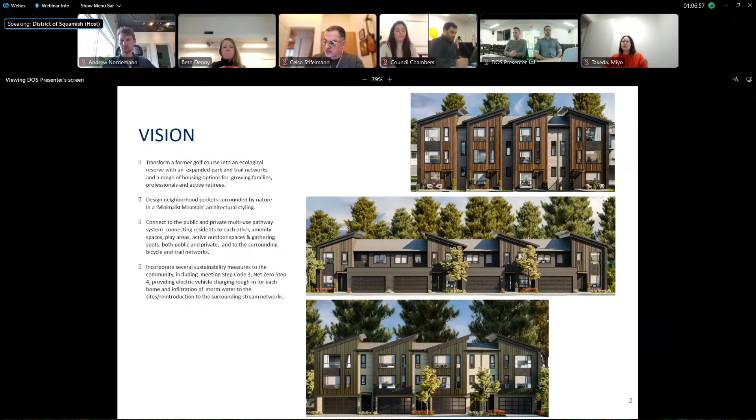Glenwild specifically, it was to design a neighborhood pocket surrounded by nature in a minimalist mountain architectural styling. We are also looking to connect to the public and private multi-use pathway systems, connecting residents to each other, amenity spaces, play areas, active outdoor spaces, and gathering spots, both public and private, and to the surrounding bicycle and trail networks.

We are also incorporating several sustainability measures to the community, including meeting Step Code 3, Net Zero Step 4, providing electric vehicle charging rough-ins in each home, and infiltration of stormwater to the site and reintroduction to the surrounding stream networks.

We'll go back to architectural influences. So we're taking the cues for our architectural influences from the surroundings, but putting a contemporary twist on it. We're looking at a minimalist mountain architectural styling, focusing on simple, clean lines, distinct mono-pitch roof forms.

Paired with contemporary window forms and groupings to help identify the unique character. Fiber cement board and batten siding in natural colors, fiber cement horizontal plank cladding, fin walls, timber and glass canopies help create the exciting architectural character that Squamish is known for.

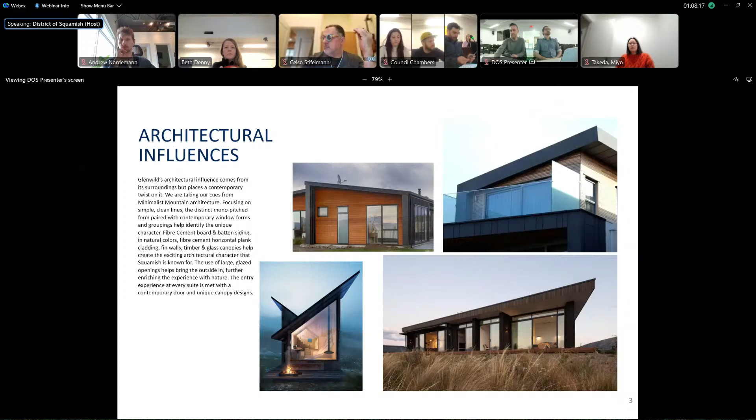The use of large glazed openings helps bring the outside in, further enriching the experience with nature. The entry experience at every suite is met with a contemporary door and unique canopy design. So just some samples of some of the inspiration we took when looking to create the design of these homes.

So just a quick outline on how we chose to address color on this site. We have 5 different color schemes, and all colors reflect the natural surrounding area. So we've selected very natural colors. Now, each of the 5 color palettes is applied to the building 2 different ways, so we have really 10 distinct color palettes applied across the site. We have 34 buildings across the site, so each color application only appears on a maximum of 3 or 4 buildings. So the color palette is quite distinct and unique.

Maybe I'll quickly talk to further variations. So aside from the 10 color schemes and material applications, we have 2 unique entry canopies applied to these buildings. The first is a wood and glass canopy that is cantilevered from the building. The second is a flat roof entry canopy with timber beams and posts and exposed ornate connections. I should also note there are 2 different door colors we're using across the color schemes, as well as 2 different garage door types: one standard garage door and glazed garage doors in key locations.

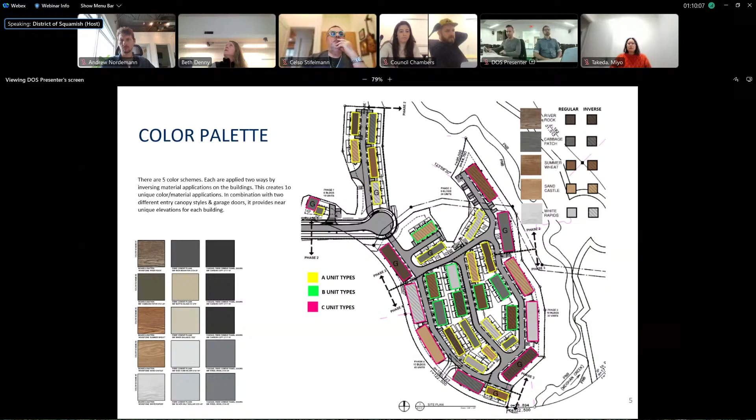So just an overall snapshot of where the development is in the overall Garibaldi Springs site. Glenwild, like I said, is the final group of townhomes in the 120-acre Garibaldi Springs community. We're providing 123 homes of varying sizes, including ground-oriented adaptable homes sited on the southern end of Garibaldi Springs. We have 36 ground-oriented adaptable homes scattered across the site, meeting the housing requirements set out in the DPA. The planning has been designed to work with the unique shape of the site, which is certainly interesting.

Connectivity to the adjacent trail networks has been accommodated with links through the community. A large outdoor amenity space has been provided at the entry of the site. This area was selected carefully to ensure accessibility was achieved for all residents. The contemporary architectural expression has been threaded through all homes: simple asymmetrical forms, large glazed openings that invite the natural world in, and crisp, clean details.

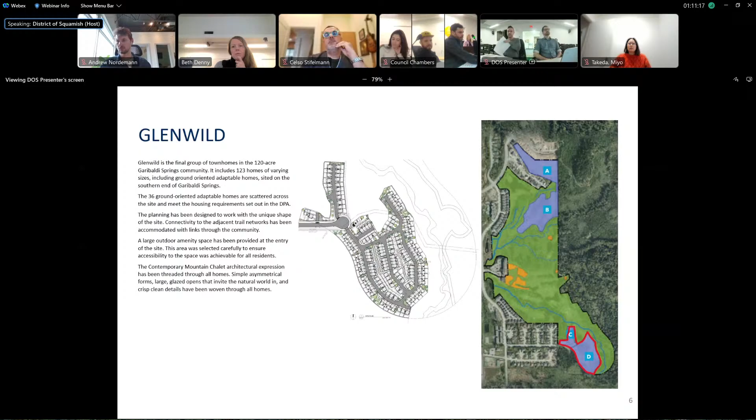Flip to the next slide here. So a closer look at Glenwild, just highlighting some of the key parts of the site.

Our mailboxes are located off of the sidewalk up on Newport Ridge Drive. We have a centrally located garbage and recycling space that meets all requirements. All of our ground-oriented adaptable homes are located around the perimeter of the site, and then we have our outdoor amenity space and community monument right at the entry.

So I'll turn it over to Travis to speak to the connectivity on the site. Thanks, Ryan. I'm Travis, the landscape architect with Van der Zalm + Associates, and I'll start with connectivity. I don't know if you noticed in this image, we're developing on the literal heart of Squamish - the shape of the site.

Anyways, so connectivity: the site's accessed by Newport Ridge Drive and has a sidewalk entry, and it has the Garibaldi multi-use pathway connection. This comes into the entry node where you meet the outdoor amenity space, and the pathway switches either north towards lots A and B, or south down through our common internal walkway system over to the Coho Trail.

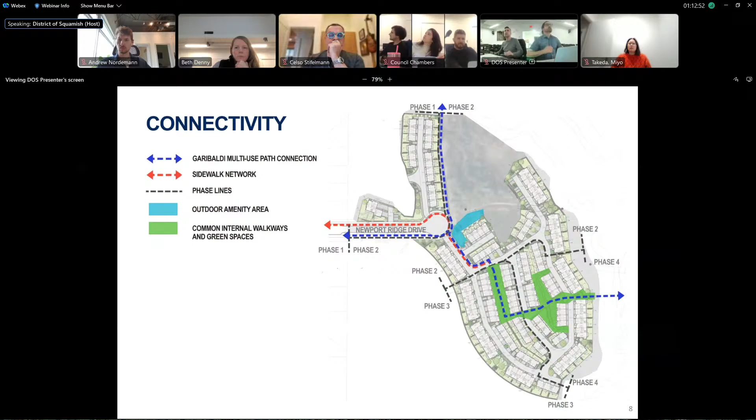Focusing a bit more on the amenity space, as we noted, it's at the entry. So we see it as it sits behind the entry sign at this entrance gathering node. The amenity is ideally located as it opens visually to the north of the site and will receive full sun later in the day, and also good afternoon sun as it's open to the north and west. This openness is in contrast to how many spaces are typically sited, what is often a remnant piece of land fully enclosed by townhomes. The adjacent townhome overlooks the space, as do the townhomes to the northwest on Lot C. The central location increases the eyes on the space by passersby and also increases its potential as a meetup spot.

The L shape of the space provides two distinct areas for different groups, perhaps children in the main play space and dogs on the entry lawn. The entry to the space includes a seating plaza with a shelter and varied accessible seating, and then a traditional play area, which includes a playhouse, a compound robinia structure with slide, spinner, spring toy, and swings, as well as an open lawn beyond. While the play area is focused primarily on ages 2 to 5, the swing has one belt swing and one bucket swing, so that all ages can use the swing set and enjoy.

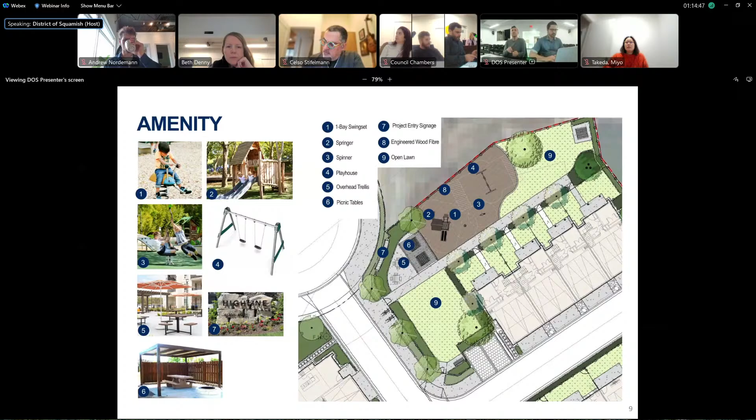Pass it back to Ryan to talk more about the townhome unit types.

We'll get into the 3 different unit types we are providing at Glenwild. This is our A-type home. This home has been used on the previous 2 developments and is quite successful. It's our traditional 3-story townhome layout with entry and garage space on the lower floor.

We're also providing a private rear deck and generous yards for these homes. The A homes will all have the garage and entry facing the Strata Road, with balconies and yards off the rear.

Moving on to the B-type home. These are also a traditional 3-story townhome layout with entry and garage space on the lower floor, along with a den. The main living spaces are located on the 2nd floor and all bedrooms are on the upper floor.

The difference from the A homes is that the entries are oriented towards a mews walkway on the opposite side from the garage. These homes also feature 3 bedrooms and range from about 1,590 to 1,675 square feet. These blocks have been kept to smaller numbers, 3 or 4 homes per townhome block.

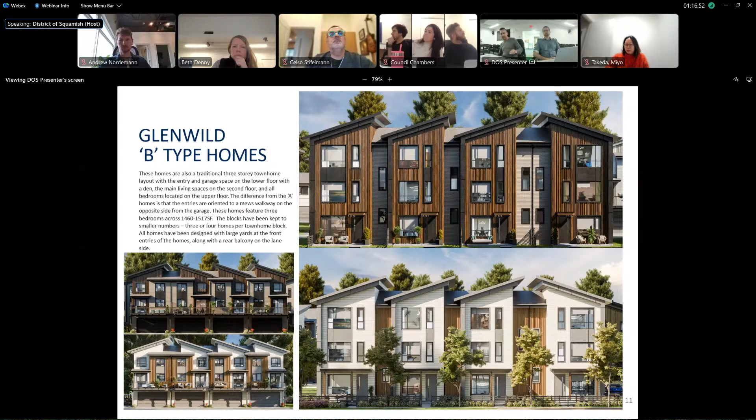Moving on to our adaptable unit, ground level adaptable unit. These are our C-type homes. They're 2-story and all located along the perimeter of the site, making them the largest of the 3 home variations. Sizes range from 2,115 to 2,190 square feet, and they have the feel of a single family home.

They feature 3 bedrooms on the upper floor with an additional open concept living space up there as well. The adaptable living spaces—kitchen, bedroom, and bathroom—are all located on the main floor.

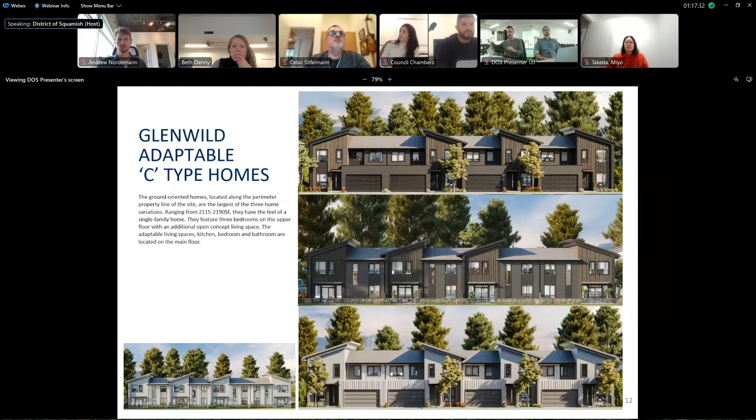I'll just jump into a quick look at some of the plans. Again, we've provided a range of housing options here: the A, B, and C type homes, and again the larger one very reminiscent of single family homes. The homes offer options for all sorts of demographics, further building on the diversity that makes Squamish unique.

All floor plans place an emphasis on outdoor living with generous private outdoor spaces and access to nearby common outdoor spaces. Articulated facades with large windows provide abundant natural light while maximizing privacy. This is our standard home, the A home, with approximately 55 units across the site.

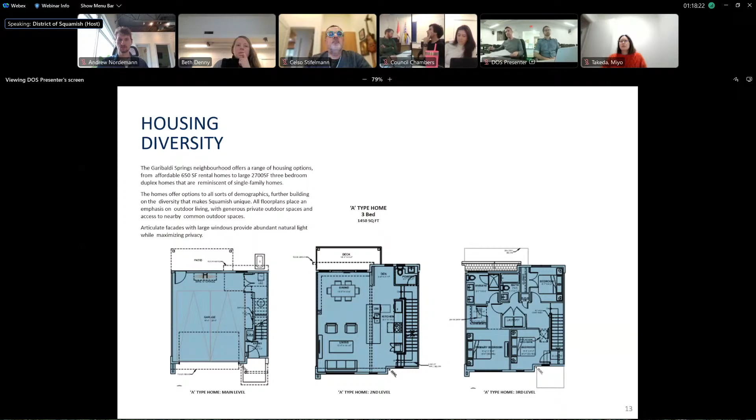Moving back to the B plan. Again, very similar to what we outlined earlier: garage on one side, suite entry with a large front yard on the opposite side, 3 bedrooms upstairs, main living spaces on the second floor.

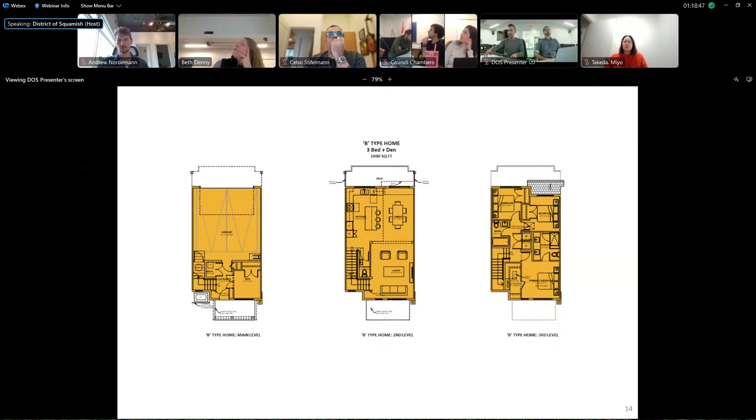Then we move on to our C home, which is our ground level adaptable suite. We've provided an adaptable bedroom and bathroom on the ground floor. Access to these homes will not be impeded by any steps. We've designed them so suite entries are all accessible with accessible thresholds and meet all turning clearances.

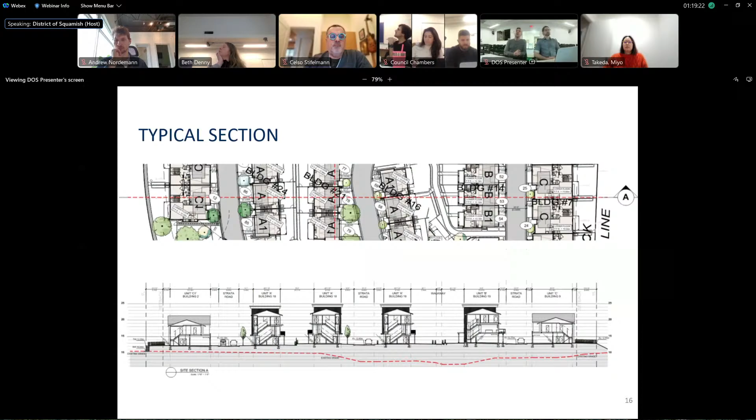Here's a typical site section, so you can see what we're doing to fill the site in order to bring it up above the flood construction level. You can jump into your landscape. Sure, yeah, and we have a few extra sections here.

Section 1 shows the continuation of the Garibaldi Trail between the townhomes. I'm noticing an error on this section—it says the trail is only 1.5 meters wide, but in our recent iteration we've widened it to 2 meters, as you'll see on our plans throughout the site.

Section 2 shows a typical wall interface at the edge of the site. In some locations it merely slopes to the existing grade; however, in others there's a walled step in order to meet the flood level elevation needs.

It's been recommended that we consider tiering the walls over the guideline, since we were slightly over the guideline height. However, we think a slightly higher wall facing into the natural space, with significant distance to residential neighbors, is a better use of space and will have minimal visual impact.

Finally, you'll see the amphibian barrier we're including around this site as a wildlife protective measure. Sometimes the barrier is against the wall and other times against the fence as required. This is what led to the solid board fence design, to hide the view of the barrier, but we've opened it up at the top to minimize its impact so people have a full view of the forest beyond.

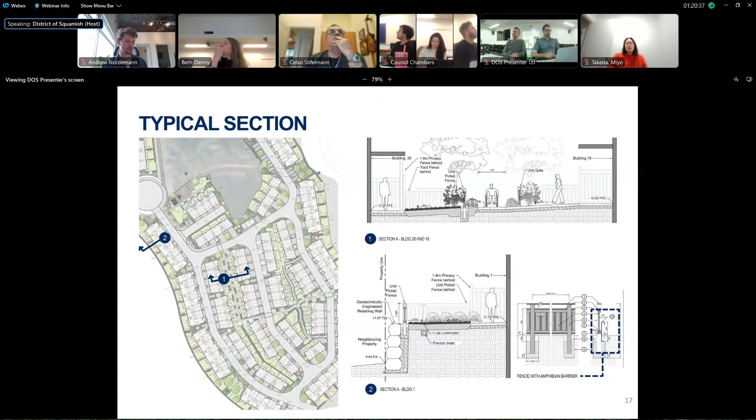Flip it back to Travis to talk about planting. The planting palette for this project provides a mix of plants: evergreen, deciduous, and herbaceous. In planting design, we seek to provide visual interest and durability through a mix of plant varieties offering seasonal colors. We've avoided fir or fire-prone trees or shrubs, and switched from using cedar and yew, opting instead for euonymus, greenspire, and boxwood for evergreen hedging needs. We've also included ornamental grasses, which add verticality and lightness, giving a West Coast character to the planted spaces.

Regarding trees, the site, like Ryan mentioned, is surrounded by dense forest on most sides, with a mix of alders and conifers. This provides a thick edge around the development, so we've opted to avoid planting trees on the forest edge yards to allow light and openness, instead focusing our tree planting more heavily in the center of the spaces. The district guidelines for placing conifer trees were followed, ensuring no conifer tree is closer than 6 meters to a building. For this site, 163 replacement trees are required, with approximately 10 cubic meters of soil volume required per tree. This requirement has been met, as demonstrated on our soil volume plans L02B and L02C.

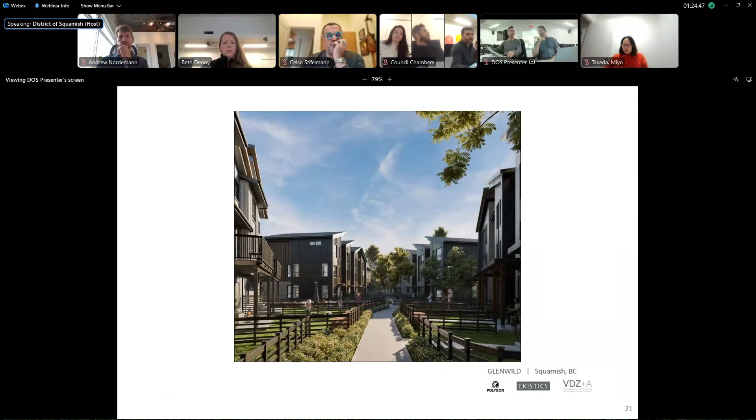Great, thanks very much. We'll now offer each panelist an opportunity to ask questions of the design team, followed by a round of comments. Starting with questions, I'll go to the panelists online first. We'll start with Andrew—do you have any questions for clarification?

I was curious about the central garbage—does that service all of the units? Is it the comprehensive plan for waste management? Sorry, I couldn't hear the last part of your comment there. Serve all units? It does—the main garbage room serves all units, yes, and it is centrally located.

With respect to the height variance, what is the zero mark for measuring height here?

I can respond to that. So height, as per the zoning bylaw, is measured from the lower of existing or finished grade. So in this case it's existing grade.

Okay, thank you. I don't have any further questions. Thanks, Andrew. We'll go to Celso next.

Thank you, thanks for the presentation. I have a few questions. Since we're starting to talk about floodplains, I understand we did accept some variations for floodplains where the only use for the ground level were access to the upper levels and some laundry and stuff like that. I see that there are some dens and other uses indicated in the floor plans. Can someone from the city explain how exactly we're assessing the floodplain and the ability to comment on any variation requested for that purpose, and what is the criteria?

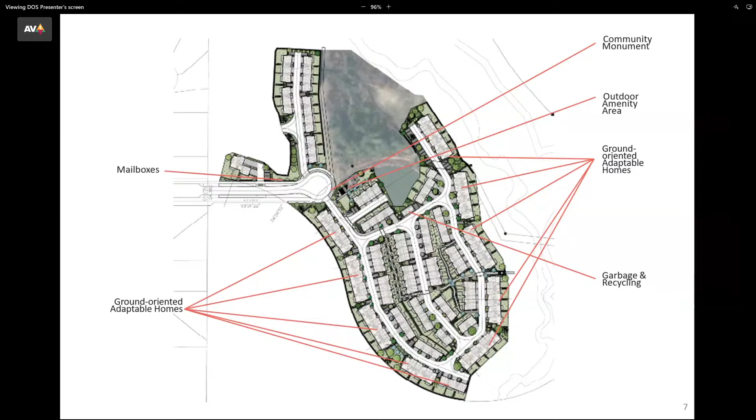This seems to be the best plan. It's kind of hard to see. For the most part, there are walls around much of the site. Where there aren't walls is on the east side, just below the aorta - sorry, it looks like a heart. So on the northeast, where the thumb kind of ends, there's no walls all the way down to the bottom corner. That part has a sloping landscape. Beyond that, we have walls everywhere.

Where are they beyond the requirement? To be honest, I'm not 100% sure. I would guess in many cases.

Let's see here. I think they're the most severe on the southwest side, which is facing a forest. You can see the residential lots approximately 80 meters away through the dense forest. So I guess we have over-height walls, but they are surrounded by dense forest. I guess it's the question of whether you feel there's a visual impact to the forest.

And just to clarify, they all kind of face away from the usable spaces, so that's where the tiering would occur. The whole project is a podium, and then it steps down to the surrounding nature. Okay, yeah, cool, thank you.

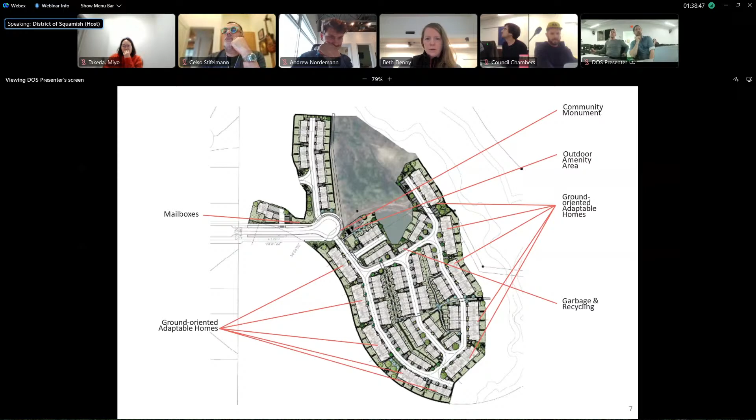Is it like a nature path? Sorry if there's a drawing I've missed. Right, you're right, we don't have a drawing for it yet. It's leading to a nature trail, so it's going to have a nature aesthetic. You do have a drawing set that gives detail. Oh okay, thank you, it's been a while.

I think given the grade change - we're filling the site to get above the floodplain - it's almost impossible to get a ramp connection through there. Oh, I'm not speaking for a ramp, I'm just wondering, is it like 3 stairs? Maybe if someone's got the drawings, I could just quickly look at it. I'm sorry, I've missed it. Thanks, Celso.

Okay. And then just to speak to the wall again, like I know the park edge that's there, there's a play area that's right on that north side. What's the treatment at that edge between the kids' play area and that drop?

We have a fence around the entire amenity space, so that's a fence and guardrail, like the detail we showed. And then we have some plantings. Do we have planting? Let me just double check here. I think there's some planted edges there, but mostly it's nature beyond. So we kind of want people to just look out and see what's beyond the site.

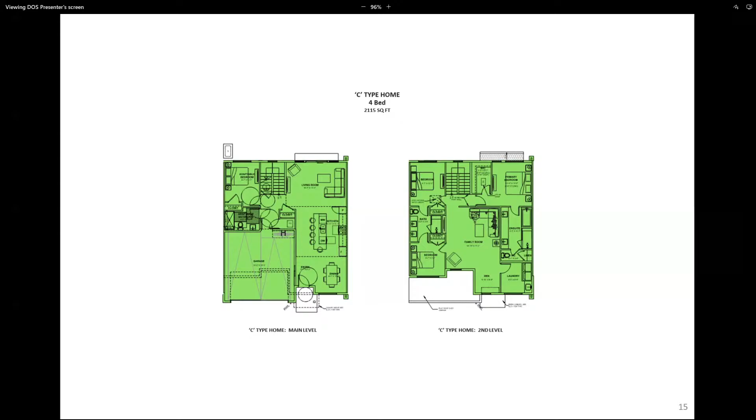So this is the same plan that you received in your package. Maybe I'm looking at an older version. Oh, can you go back to that one? That's the same one? Oh, so that's an end version. You're seeing the middle, we always provide a middle unit and end units. The end units have bump outs on the side. Gotcha, okay, so this is the common internal unit, that makes more sense.

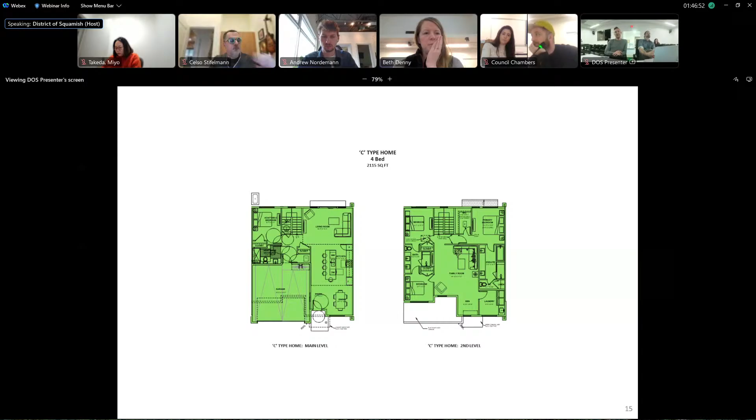On that one, did you ever explore having a patio door at the family room to go out onto the roof of the garage? I know that's something that likes to get discussed, but it's not something we've entertained. Polygon isn't typically keen on doing roof decks. That's fair.

So I guess you're building the entire site up, my last question. I know there's this discussion around tree soil volume for trees. Is there any opportunity to integrate more structural soil as you're building it up, to kind of get that volume?

I use structural soil in projects, typically in parking lots, where you have very regular things, you can get your 5 or whatever meters and add more for structural soil. Structural soil is only good as a 4-to-1 sort of value, so it's mostly rock. You need a lot of it to actually get the volumes you're talking about, 10 meters of soil. And it also has only a 1-inch sort of continuous access through it because it's crushed stone. So you're going to get roots that go into it and they'll do something, but you're not going to get structural roots moving beyond your confined space anyway.

So you can do it, but it adds a level of complexity to the building process, and I don't think it offers the value of the things we're planning to do. In my opinion, it makes a bit of a mess without offering enough value added in this kind of situation, because we're confined by one side already with a building, and probably other utilities. So you start to lose out, you put all this structural soil in the ground, like 5 or 10 cubic meters, and you get your 2 out of it. Is that really worth it after all that work? I don't think so. Okay, perfect, thank you, that's all my questions.

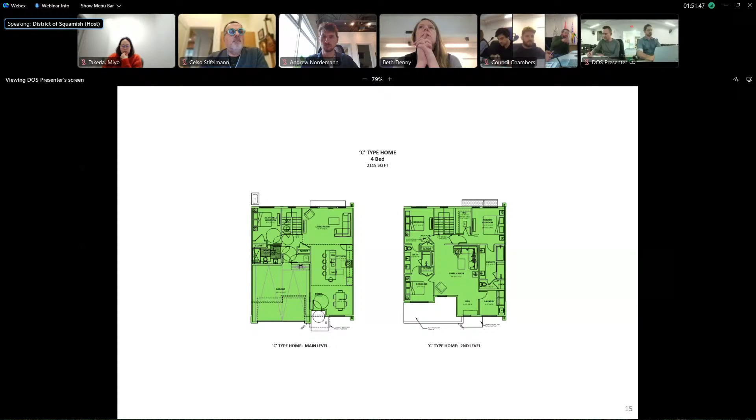And maybe this is a question for Jessie - is there any leeway for the applicant to, within reason, change the alignment of the Garibaldi path network? Yeah, so this will be a key connection for the Garibaldi path that goes up to the other phases, as well as to other trails throughout the site. So it depends what you're thinking.

Should I say that now or in the comments section? If it's going to clarify the intent of your question, that's probably all right.

I guess what I'm wondering about is with bikes moving through this site - I'm okay with the height of the retaining walls most everywhere, except for along the one stretch where the paths head north-south, heading north off-site, where the wall gets quite high next to the path there. So instead of changing the building and the yards, I'm wondering about changing the path, leaving it a little bit further from the wall, and then maybe incorporating some plantings in front of the wall so it doesn't feel like you're right up against a big wall. Yeah, I think it's almost 2.5 or 3 meters at one end.

And then further to that is the alignment of the pathway connecting through the site and off east towards the Coho Park Trail. I think there's a right angle corner through there with a privacy fence, and I'm thinking about people on bikes moving through - if there can be better flow there. I don't know if that means modifying that yard, but I think there will be a lot of users on this pathway, so it's going to be a common route. Isn't it right there? Yeah, right through here.